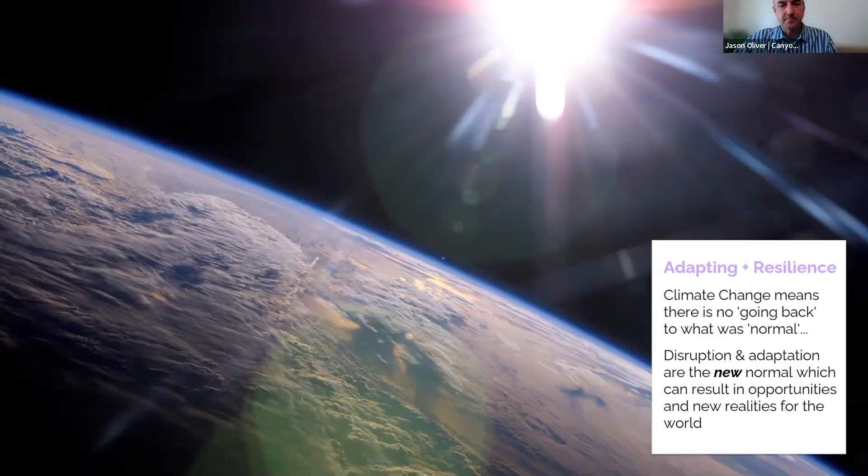So we think of the multitude of issues we need to address, both locally in the areas where we live, and globally as well, because it's all related on a larger scale. It almost appears impossible to be resilient in the face of all these dangers. I know from conversations we've had with our friends in Romania that a lot of the same exact climate issues being faced in Eastern Europe are the same ones we're facing in Southern California, where I'm at, and vice versa. So it's really interesting, the parallels.

That being said, we do have much of the technology and scientific knowledge needed to address a lot of these issues. But unfortunately, where we really need to improve is how we navigate the political, economic, and psychological hurdles that often stand in the way of our substantive ability to address climate change.

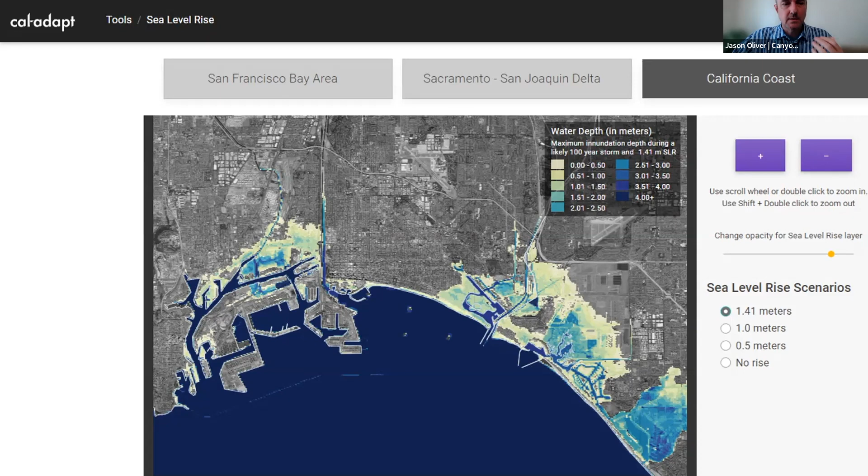Another part of climate science relates to global warming, which is something we're fairly familiar with. Unfortunately, there are quite a few people in the world that don't subscribe to the idea that the Earth is warming, although we have adequate information and data that shows the climate has throughout its entire life gone through warming and cooling cycles. But most recently, in light of the Industrial Revolution and carbon emissions and greenhouse gas emissions, a lot of the extreme global warming we're experiencing is human caused.

There are other areas, even in the Rocky Mountains—in the Utah, Colorado area—where they've seen average temperature rise of 4 to 5 degrees, and that's fairly significant, such that it alters the natural ecosystem. Why is that important to us?

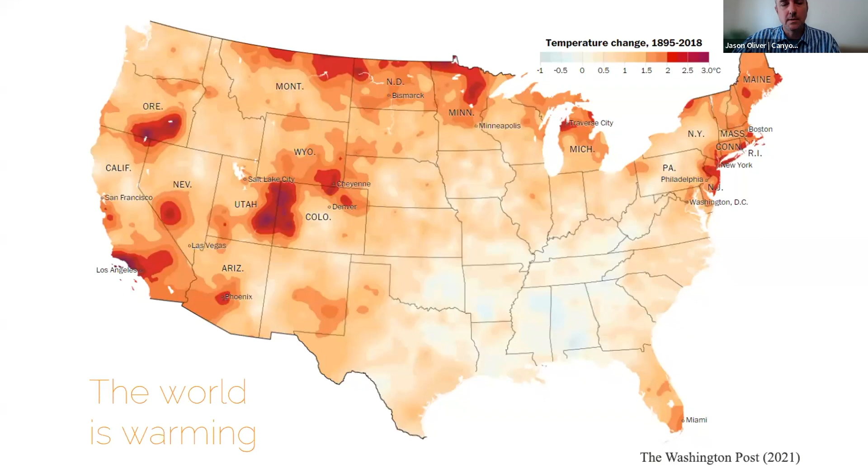And so that's obviously a very acute issue that we need to be aware of and to address. Along with global warming is the impact of extreme heat, which everybody's experienced quite a bit in the developed world, where the temperature of developed areas tends to be warmer than natural vegetated or rural areas, simply because of the construction materials used to build cities.

If you think about our roads, a lot of them are made with asphaltic concrete, or asphalt, which is basically a black petroleum-based tar product. The physical characteristics and color of that material are such that as it's bombarded by solar radiation throughout the day, instead of bouncing back out into space like it ordinarily would, it's absorbed into the earth and re-radiated out as heat.

That's one of the factors that increases heat in developed areas. In a dense urban environment, the temperature might be as much as 10 or 15 degrees warmer than in rural or natively landscaped natural areas. As the earth gets warmer, we have these extreme heat days, which are dangerous for people. People can die of heat stroke, and do every year, and it's in some ways a consequence of the materials and colors used in our built environment.

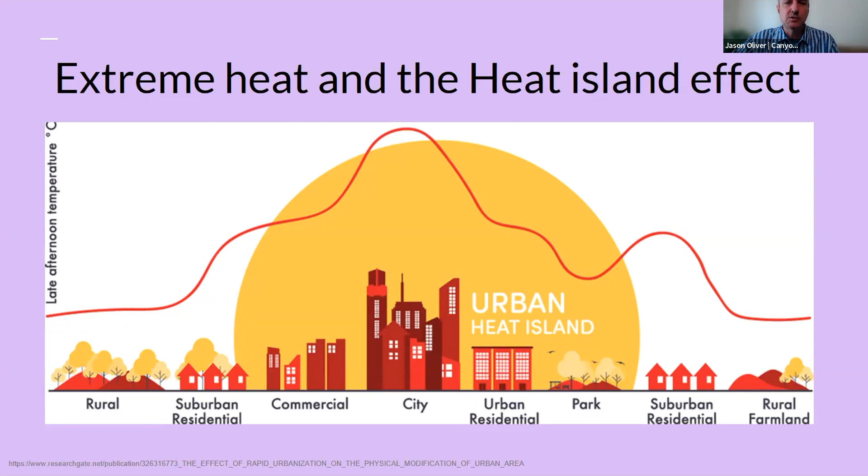Being aware of and sensitive to that, we can start to select other materials and colors that will reflect more solar radiation out into space. That's a decision-making thing we can do, being informed by an understanding of global warming and the extreme heat that's caused by it. So we can see some very obvious examples of the heat island effect occurring.

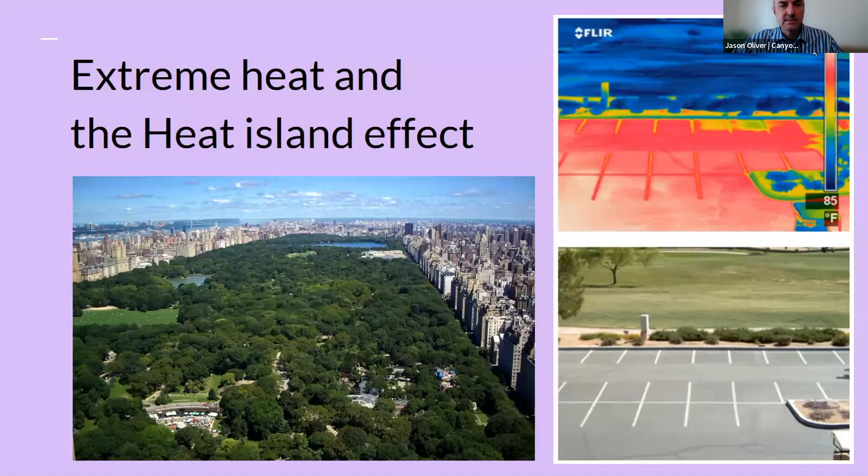On the right, we have some infrared photographs; the top one shows more scientifically the temperature change of surfaces bombarded by solar radiation. In the foreground is a parking lot with an asphalt surface, and in the background is grass or turf, probably a park. The temperature differential is as much as 40 degrees or more between the two, simply because of the difference in materials. They're both receiving the same amount of solar radiation, but one reflects more of it back into space, while the other absorbs it and re-radiates the heat, which creates the extreme heat effect and makes it dangerous for people.

So one strategy we can continue to employ is simply planting trees, more vegetation. The movement for urban forestry is important, but it's not as simple as just planting trees.

Whereas in Boyle Heights, where the community may be more transitory, with people coming and going, there's probably less sense of ownership. A lot of the houses or residences might be rental properties where people don't own them, so there's less ability or desire to plant trees. So although planting trees may seem simple, it's tied into much deeper, more complex decisions, long-term decisions, and economics that aren't always readily resolved.

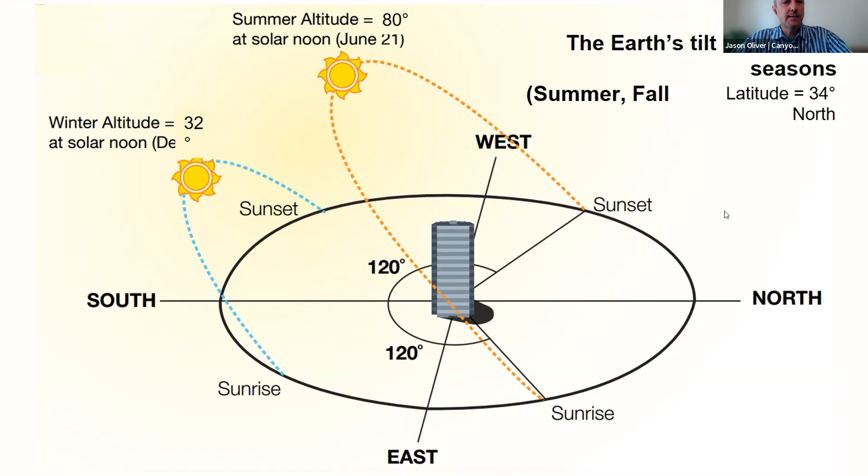So obviously, if we're going to be dealing with things like the heat island effect, so much of what we do in sustainable design revolves around the sun. The sun is a very important element we consider in sustainable architecture, because of the way it heats buildings, which we may or may not want. Here in Southern California, we traditionally want to keep buildings cooler, so we protect them from the sun, but we also want natural daylighting. We want to allow natural daylight in so we don't need artificial lighting. So there's this tension between harnessing the solar radiation the sun provides and protecting against the heat it generates. We want to allow daylight in, not directly, but maybe through northerly light or bounce light.

So for a lot of residential homes, particularly here in Southern California—I can't speak to what you might see in Eastern Europe—a lot of our newer homes built over the last 20, 30, 40 years are developed by large corporations that build freestanding single-family homes, and they really don't have any acknowledgement of the sun. They have windows that let in natural daylight, but they don't do anything to deal with the shading needed to protect the house from excessive solar radiation. They're really intended to look like a prototypical or traditional home. That's the most important aspect of selling the home, not dealing with the performance needed to make it sustainable. Even though there's a lot of attention put into the detailing and materials, they're not put there for performance reasons, but for aesthetic or appearance reasons. I think that's a huge part of our built environment here in Southern California that should be addressed immediately.

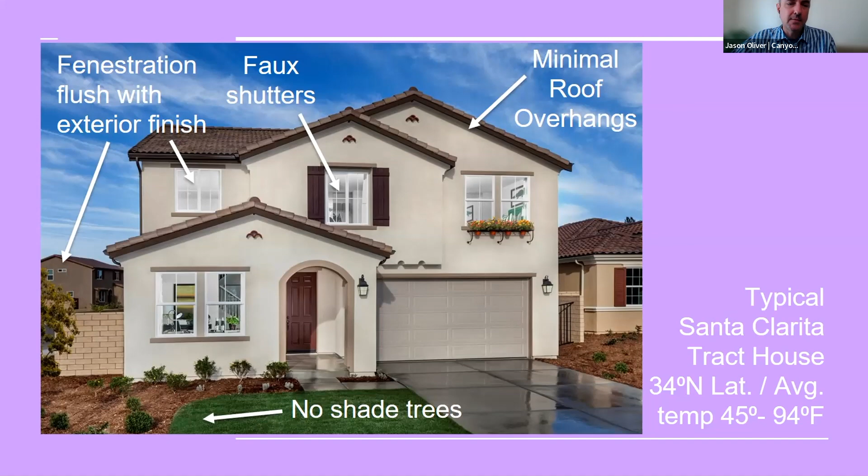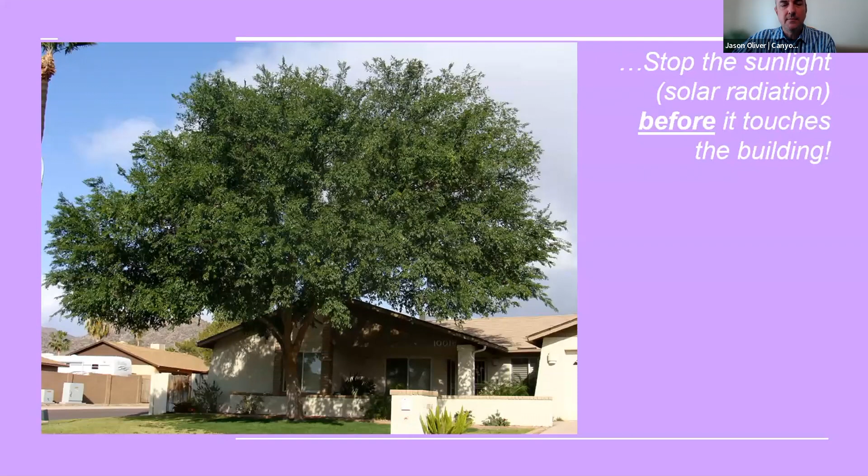One of the simplest decisions is to plant trees, so one aspect of dealing with the sun is stopping its direct solar radiation from hitting the building in the first place. Being strategic about how you can use vegetation like trees to shade a building—vegetation also plays a larger role in providing environments for the biome, plants, insects, pollinators, birds, and the larger environment around us.

So it's a really unique project, this one's actually in Australia. It shows how, in residential design—this is a higher end home—we can be creative and create spaces, both internal and external, that accomplish a lot of what's needed to address the impacts of the sun or natural ventilation, as well as creating occupiable and useful space. This project has the roof extending like a shade canopy, reducing the amount of solar radiation, but also this pool of water, which has a nice aesthetic appearance, but also helps cool air brought into the house through natural ventilation via an evaporative cooling effect. As a designer, we look at how we can achieve the most out of our building forms, spaces, and materials, so they do more than just look pretty, but can be a much more efficient and effective solution.

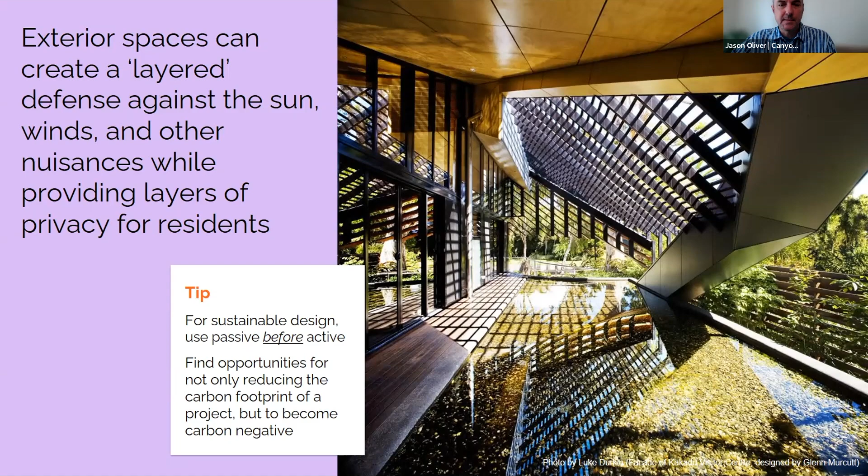Since the pandemic started a little over two years ago, another aspect we've become very sensitive to is the idea of bringing the natural environment into the interior spaces of our buildings. This is not a new trend for designers, but it's something the general public has become more aware of. One of the terms used to describe that use of vegetation inside a building is biophilia, and it has a variety of benefits. The incorporation of vegetation helps improve interior air quality because plants have the ability to filter air, taking out some toxins and improving air quality.

It also has a psychological aspect that a lot of people appreciate. It's not always a conscious thing, but the idea of having the natural environment inside helps people feel better. They feel healthier, and in the case of commercial projects like an office environment, that they actually become more productive, in the sense that they have a better sense of well-being working in those spaces, less chance or less statistical probability of calling in sick, for instance, because they actually might enjoy being in the space, because of the richness of the interior environment. But obviously, as a designer, there's implications of bringing vegetation into a building.

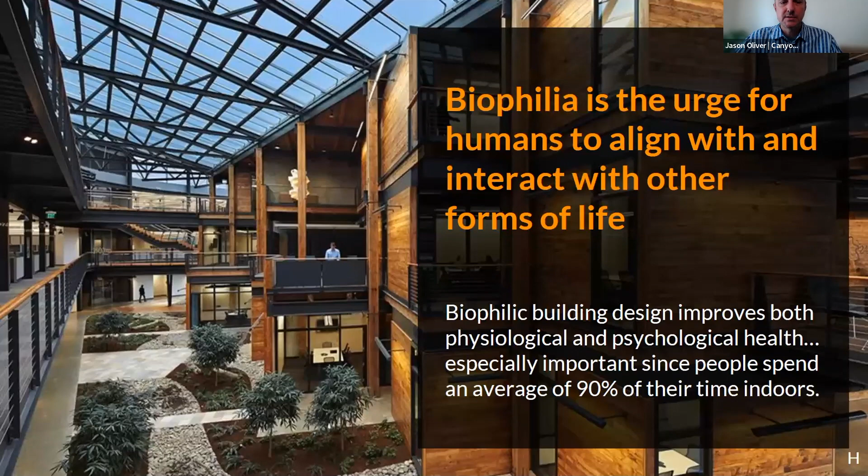Now these things have to be watered and maintained. And so there's a lot of technical issues that go along with that, in addition to just simply providing space for them.

But we're starting to see, internationally, how biophilic design can enrich not only individual buildings but larger developments citywide. And so it speaks to the idea of urban forestry, and we'll see in a minute even urban farming, and how we as humans can embrace nature and incorporate it more into our built environment.

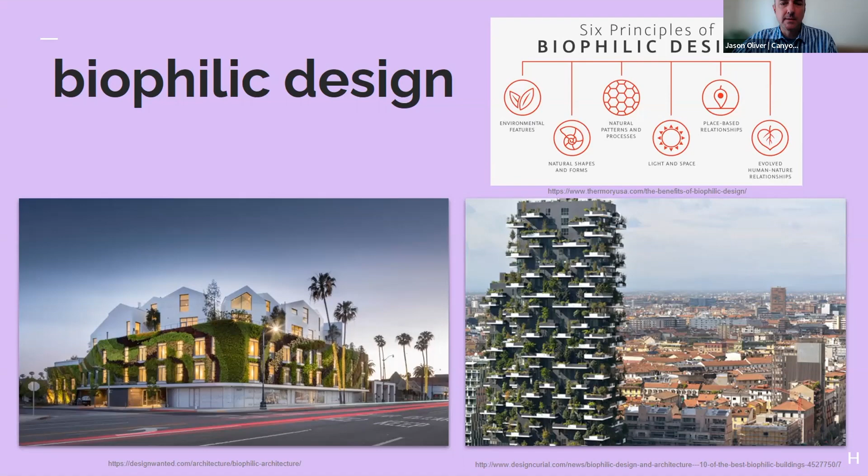So I'm really excited about the idea of urban farming. Obviously humans need food, that's readily self-apparent. But as our cities grow, as the impact on the environment is extended further and further out into what we might call greenfields or undisturbed land, we diminish our ability to actually grow the food that we need.

And so we may start to see, and I think we are starting to see on slightly larger scales, farming occurring in our cities. And if done properly, this can have the cumulative effect of not only providing food for people in the city, but also addressing some of those issues of extreme heat and heat island effect at the same time. And so it obviously has to be very thoughtful.

There's issues of how do you even harvest food? What kind of foods are appropriate to grow in the city? How do you balance it so that there's access to pollinators, bees and butterflies, and all of nature's helpers that are needed for a farm to thrive? But how do you do that in an environment where you may have in a city block 500 people or more living there? So that's obviously a rich interplay that a designer would need to do with somebody that's an expert in this type of farming in order to make it successful.

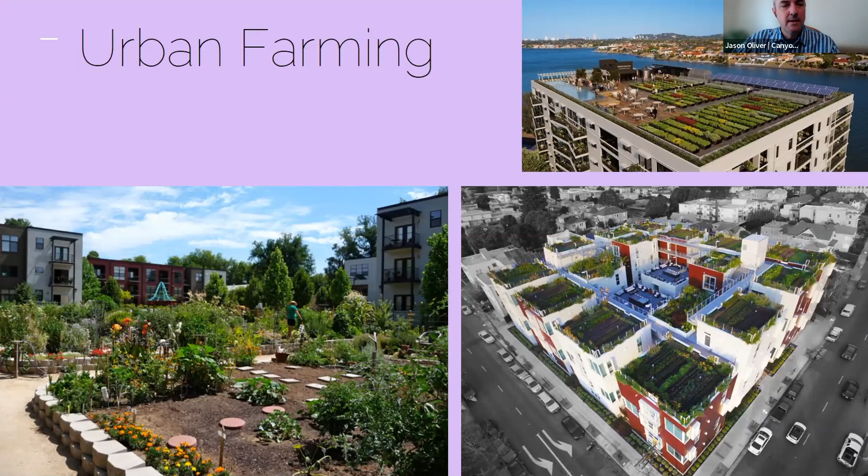So I touched a little bit earlier on water. Obviously, that's a very important aspect for all of us. We all drink water. We're all going to be drinking water probably in the next hour or two. So it's just a critical part of our lives. It's something that we can't avoid. And yet, interestingly or unfortunately, so little of the water that we have on the earth is actually suitable for drinking. And so that is a critical issue that we need to address, the idea of water scarcity.

And it's unfolding right in front of our eyes. Here in Southern California, we're almost continually in drought conditions. And yet so many people seem unaffected by the challenges.

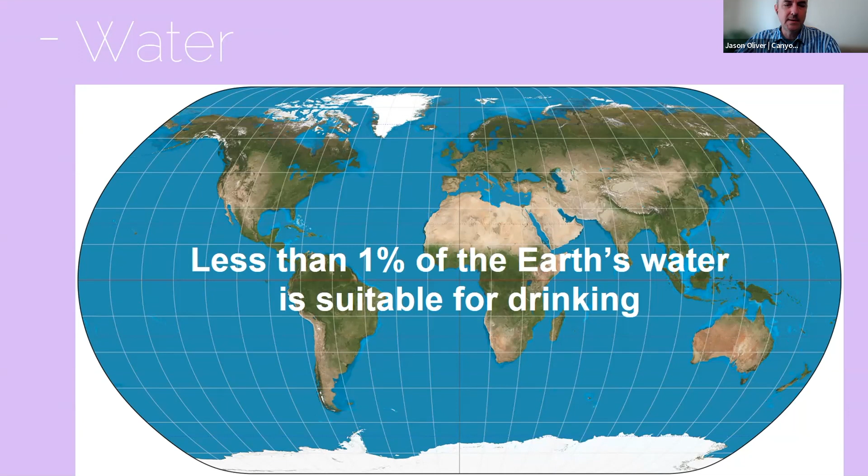Our governments have put in restrictions on our ability to water ornamental landscapes, say gardening and whatnot that you might have on a property. And yet so many people still water their lawns or have grass or turf that's inappropriate for this climate. And so there's sort of an animosity towards conserving water, but it's something that we rely on for our daily survival.

So we as designers have to understand the different scales of what is entailed in providing drinking water, which is commonly referred to as potable water, that's the technical name for it. And it's one of the most, I would consider, salient luxuries that we have in the world. We take for granted that at least in the developed parts of the world, we have easy access to potable water or drinking water that's safe, and that you can get to water fairly quickly if you needed to.

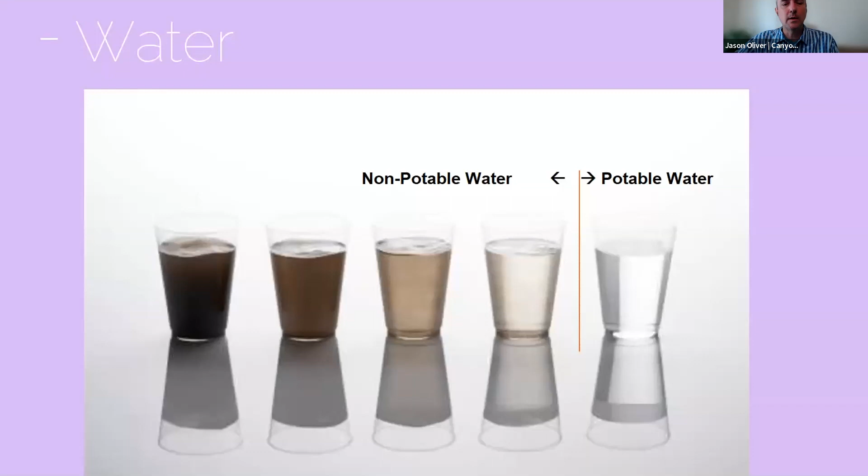A lot of parts of the world, they don't have that at all. In fact, people have to travel long distances to even get water, and often then that water is maybe not safe for drinking. Where we in the developed world see glimpses of that is when there are natural disasters that affect us, whether it's a fire or an earthquake or something like that. All of a sudden, our ability to access safe drinking water is compromised, and we realize how acute and how critical it is to our lives.

And so our ability to sort of reduce the stress on our sources of water, whether it's the aquifers underground, the below ground water storage that nature's provided for us, that will at least help provide some reserves for when we do have crises, so that water will remain available to us.

There's always a desire, I know here in Southern California, because we live so close to the Pacific Ocean, just maybe half hour's drive from Santa Clarita, why don't we just simply desalinate the water and make that drinking water? There's so much of it, but unfortunately desalination, although it's obviously possible and is done in some parts of the world, it's extremely energy intensive. And it has byproducts that come from that, the brine and the sea salt that are extracted out through the desalination process. Unfortunately, those elements are pumped back into the ocean, which has significant negative impacts to the sea life and the aquatic ecosystem around there. So we really haven't found a great solution for desalinating ocean water yet. And there's obviously a lot of parts of the world that aren't near the ocean, so they wouldn't be able to benefit from that.

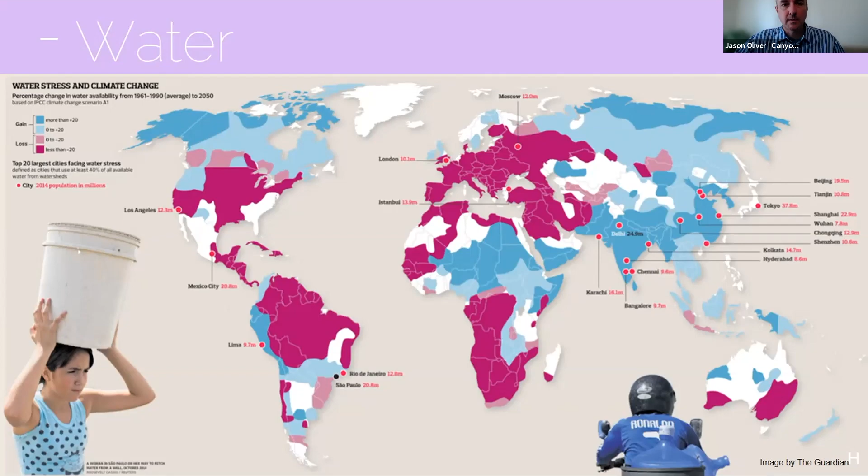So we see strategies, and we incorporate them a lot here in Southern California for capturing rainwater. We don't get a lot of rain here in Southern California, but when we do, we can obviously capture that water, and that can be used for landscaping. We're going to have plants to help with combating the heat island effect, and we may need to water them from time to time, so being able to have a store of rainwater to do that is important.

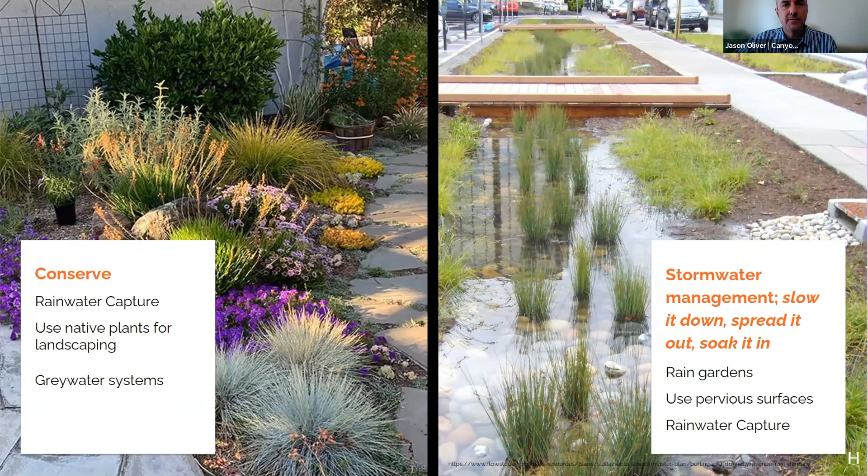We can also use gray water, which is basically water that comes from in the building, but it's not from a toxic source. So it's not from a toilet or anything contaminated with food waste or human waste, but typically laundry, washing machines, or maybe a hand sink, can be filtered and processed. That water can then be reused for non-potable uses. We wouldn't drink it, but that water can be put to a second use, so we can at least extend the effectiveness of it for a project. Being able to incorporate the equipment and systems that go along with a gray water system are something that designers need to be aware of, that technology, the spatial implications, and just how those systems work, so that we can effectively and elegantly incorporate them into our designs.

I'm also a big fan of natural ventilation, and there's a lot of comfort that can be provided by natural ventilation, and our ability for a building to sort of breathe and not rely on artificial means for not only ventilating or providing fresh air and exhausting used air out of a space, but also for cooling or potentially even heating that building. So there's a lot of interesting performance and aesthetic possibilities that go along with that.

In order to naturally ventilate a building, we've got to be very considerate about the orientation of the building, because we may need to take advantage of natural wind patterns that may occur on the site. We're also going to need to take into account shading and the design of the envelope, or skin, of the building, because that's going to play a role in our ability to let natural fresh air into the spaces. So how do we go about doing that? Through windows, and how does that interplay with shading devices?

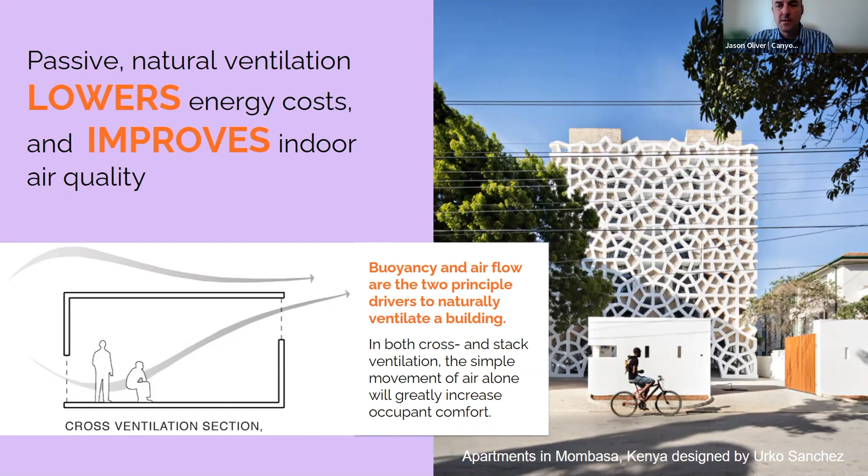We can see an example on the right here. This is a project in Africa that was recently built a couple of years ago. It's like an apartment building, and it has on the different sides a variety of different skins, almost like what we might call dual skins in the profession. Not only does it look pretty, with a really beautiful mosaic pattern, but this outer white lattice work is providing shading for the exterior wall behind it, where the windows are that people open and close in order to allow natural airflow into their residences.

As designers, there's a balancing act between achieving shading and natural ventilation while doing it in an elegant, almost artistic way that's culturally appropriate to the locale. This lattice work has a beautiful appearance that would probably only be appropriate in this particular part of the country; it might look out of place elsewhere.

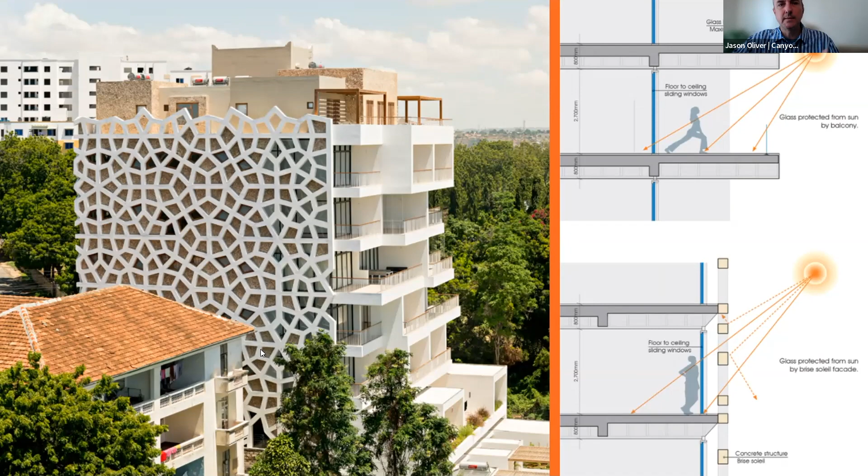Inside the residences, these are not artificially conditioned, so there's no air conditioning, which is a very energy intensive service for a building. Instead, they achieve airflow through fans or, hopefully, just the natural physics of opening and closing the right windows at the right time of day to achieve cross ventilation or natural airflow.

Another interesting goal here is the idea of a building being carbon negative. This term has to do with the carbon footprint of the building, or how much carbon emissions go into the construction, the maintenance, and the ongoing life of the project.

The materials used to construct it involve a certain amount of carbon emissions, whether it's the production of concrete or steel. Those materials have to be harvested somewhere, processed, manufactured, and transported to the site, and in all those aspects there are carbon emissions involved.

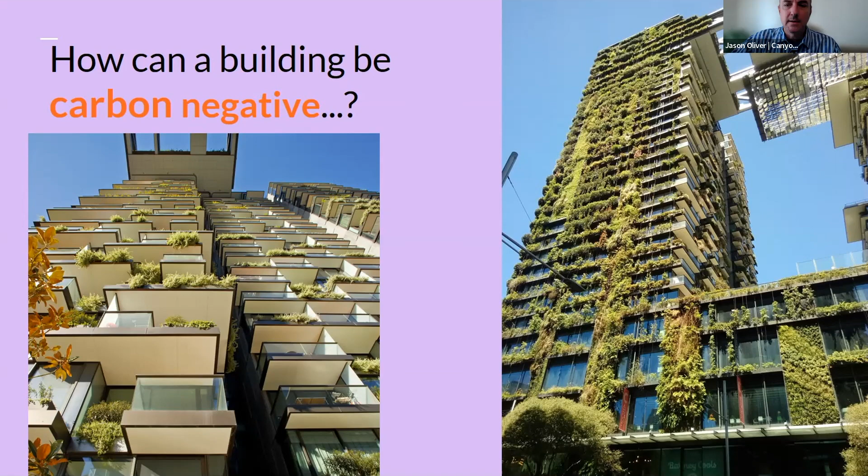This particular building is in Australia. They are one of the world leaders in sustainable building design, so if you ever get the opportunity, take a look at what's going on down in Australia - it's quite impressive.

Part of informing our decision-making process, and this is one of the things that we teach at College of the Canyons, is what is called whole building energy modeling, and the ability to simulate the effects of how we can naturally ventilate a building, what are the effects of the sun on the building, as far as how it might heat the building, or how we can provide shading to combat that excessive solar radiation.

So designers obviously need to improve and increase their skill sets, and that's something where education can step in and has been to provide those skills and to explore new opportunities for designers to be able to inform their designs, utilizing and harnessing technology. It's rather unfortunate that the building profession has not, up until this point, embraced a lot of the technology that's available.

It's as if you went to a doctor and you were complaining of some kind of a problem, and the doctor didn't take any of your vitals. They didn't check your pulse, or check your heart rate, or maybe do a sample of something to determine what's kind of going on with your body. They would be uninformed. But we obviously know that in the medical profession, they do a lot of tests because they need data to determine what's going on.

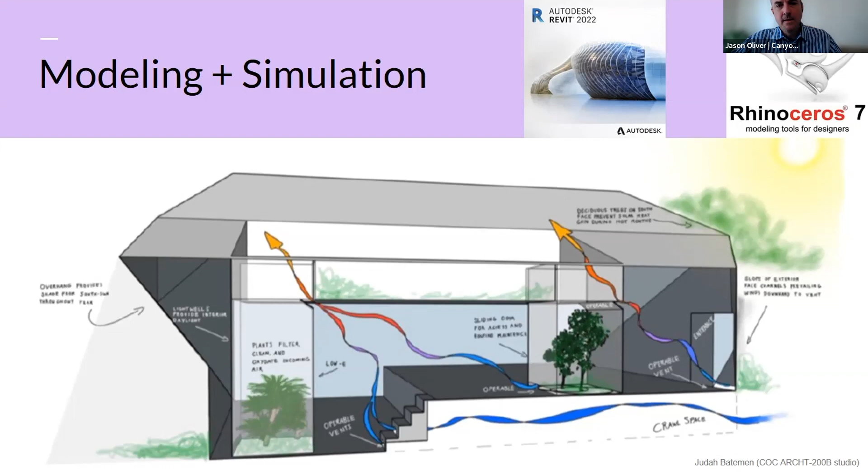But we have another leverage point or motivation for providing safe spaces and spaces that people can thrive in. Our built environments need to be responsive to people, so there's always an aspect of the social in the decision-making process. And then we've become more aware over the past 30, 40, 50 years about the environmental aspects of the planet that we need to consider in the decision-making process.

And so sustainability has traditionally resided or found its most effective application when those three things merge together. When our decisions are made that are responsive to people, planet, and profit, then that tends to be decision making that's moving in the right direction, if you will.

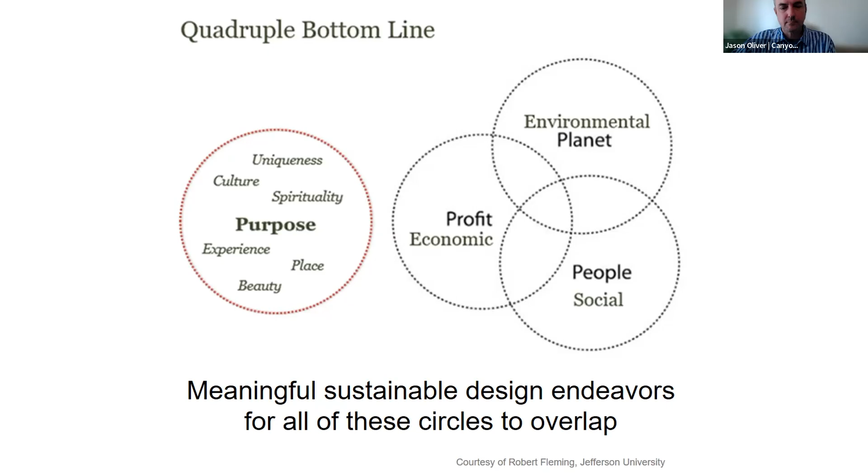And so one of the things that we do at College of the Canyons is engagement. That's one of the ways that we can provide outreach to those in Southern California that we want to touch with our ideas about the built environment, and to raise awareness about the built environment, and also to give young people, in particular young students, an awareness of their ability to change the world around them. That they can be change makers in whatever way, shape, or form that takes, whether they're designers or making economic decisions or social decisions or what have you.

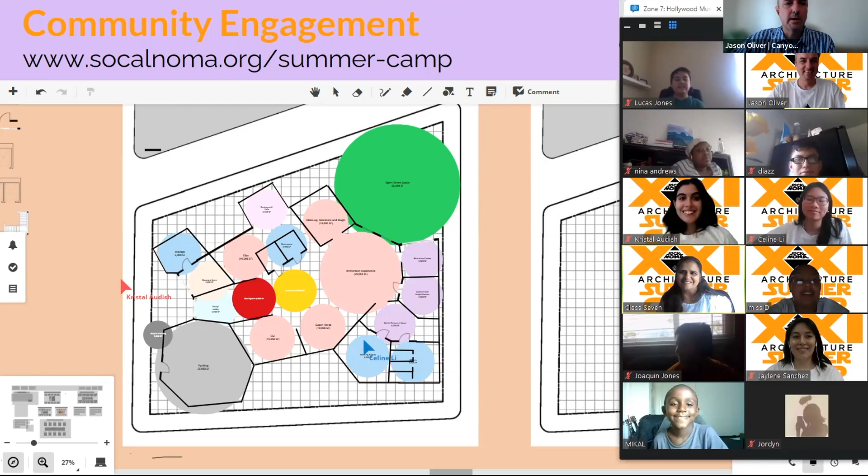So we partner up with a group called SoCal NOMA, which is the Southern California chapter of the National Organization of Minority Architects. This slide is a summer camp, actually, that's going on right now, four successive Saturdays. We're meeting with campers ages 10 to 17 and teaching them about architecture and design, and opening their eyes to the world around them. So engagement's a really important aspect of sustainable design.

So with that, thank you very much. I hope this provided an overview of just some of the considerations that architects and designers are approaching in design now and going forward. And I'm happy to entertain any questions or comments if there are any.